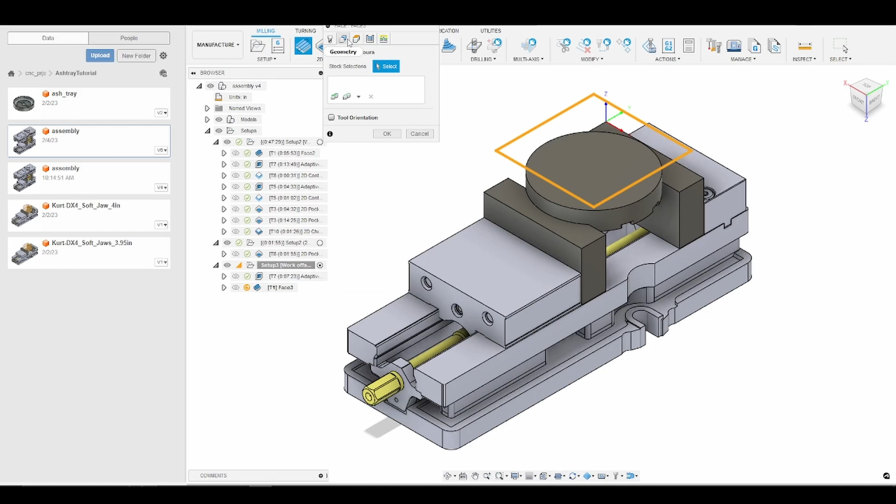I'm going into the geometry tab, leaving it the way it is, and going into the heights tab. Remember, we machined everything away except for 20 thousandths from the previous operation where we roughed the top. So I'm going to change the bottom height to be the model top, and change the top height to also be the model top, except I'll add that extra 20 thousandths worth of stock. Then we go to our passes.

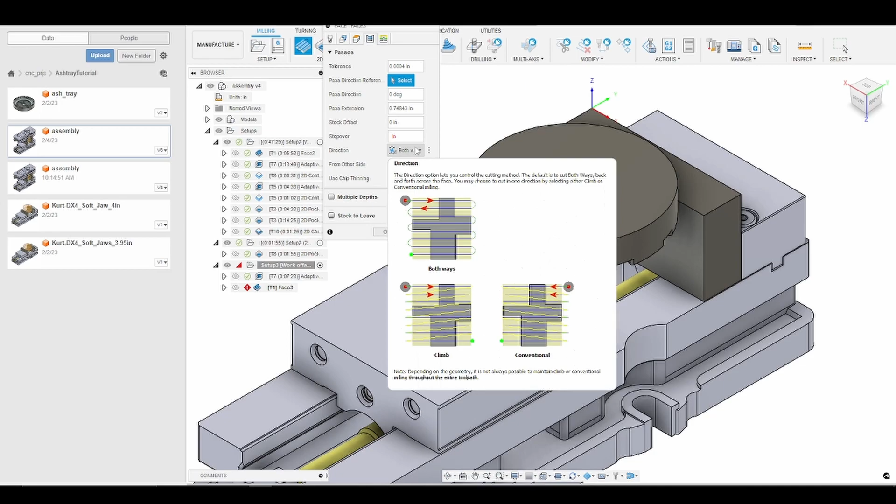Again, we're going to use 50% the diameter of the tool for our step over. That looks good. I'm going in multiple depths of 20 thousandths, and I'm going to check use even step downs and make sure in linking we check extend before retract. That way our shell mill will go all the way past the edge of our part and pick up before transitioning into the next pass, so we don't leave any marks while we dwell at the edge of the part.

Everything looks fine. Just looking over this one more time to make sure I didn't make any mistakes. It all looks good. I'm going to go ahead and press OK, and as always, we're going to simulate.

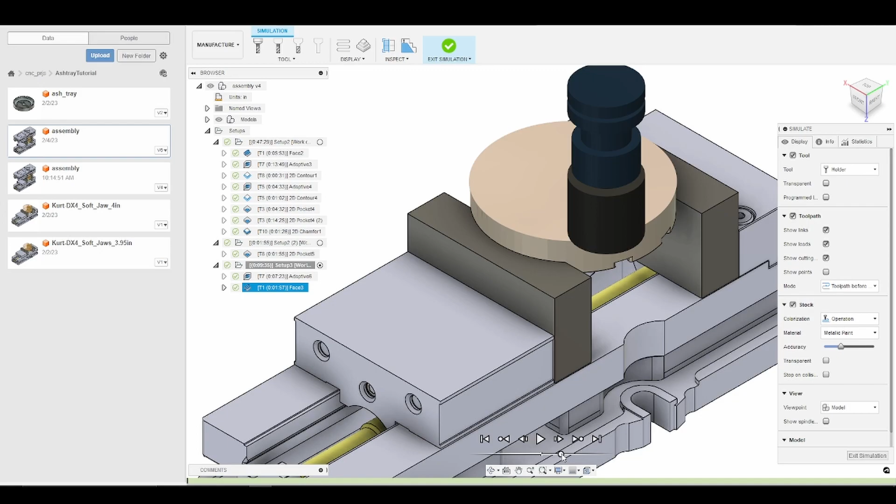Let's slow it down a little bit and we'll just go in and simulate. And there we go, we just face the back side of the ashtray.

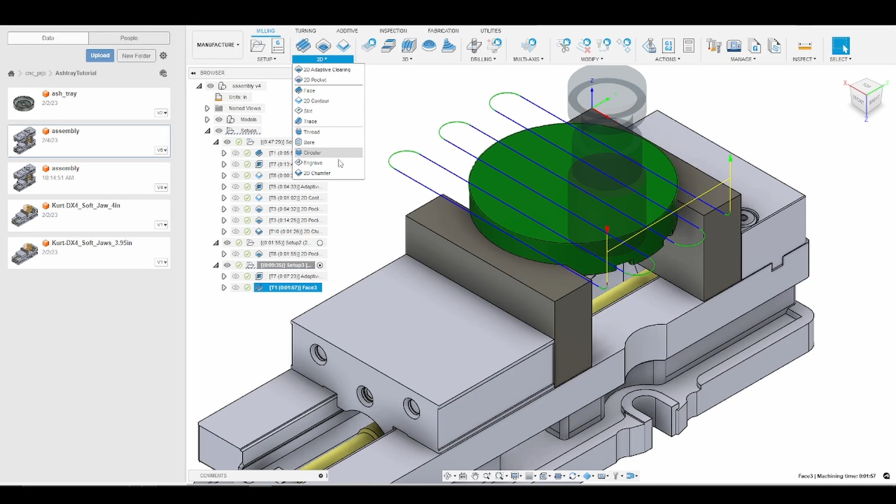Now to finish our ashtray, we're going to do a 2D chamfer just to knock off any sharp edges or burrs that may have formed on the outside perimeter. So I'm going to select the tool, go to my Toolpaths library, and select my quarter inch chamfer mill.

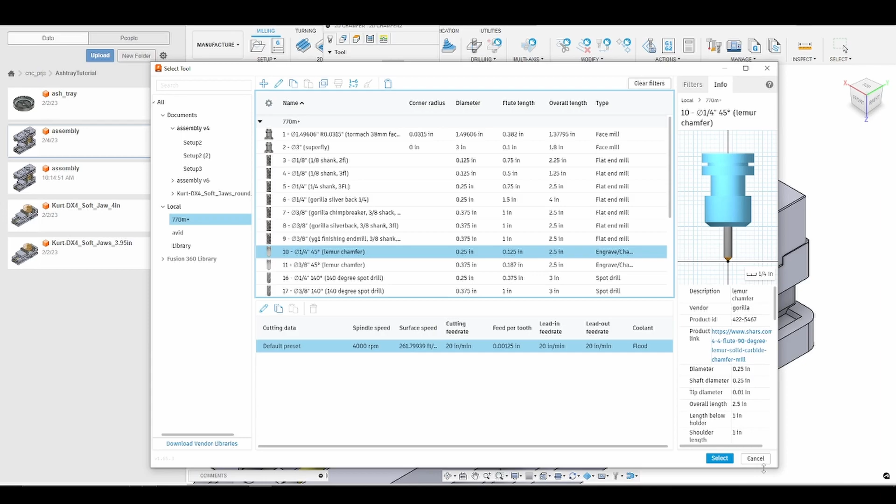We are running at 4,000 RPM, 20 inches per minute, which gives us about 1.25 thou per tooth. Going into geometry, I'm going to select the outside contour. There we go, and I'm going into heights.

Again, I'm going to make the top height the top of the model, and the bottom height selected contour is fine. We'll go into our passes tab, and I want a 15 thousandths chamfer.

You can make the chamfer width whatever you feel comfortable with. I generally use somewhere between 5 and 15 thousandths, I'm using 15 thousandths here. I'm going to enable smoothing and feed optimization, and go to the linking tab and change my lead-in sweep angle to 45 degrees.

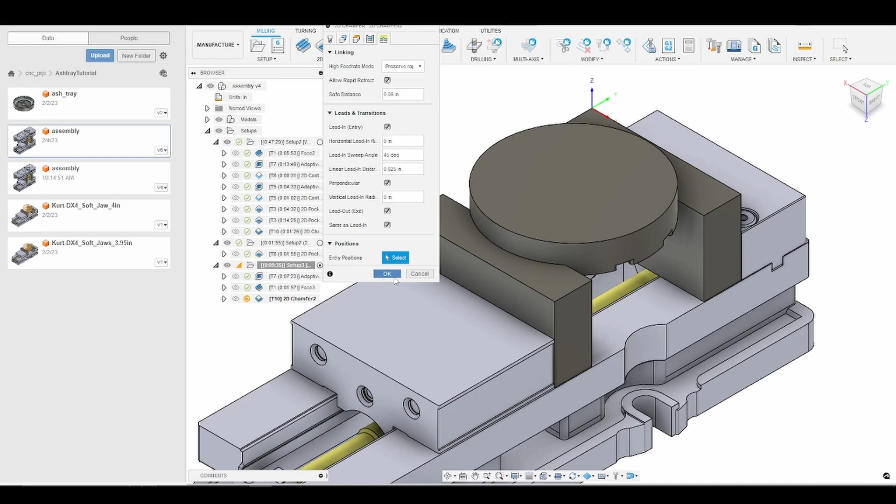Press OK, and Fusion will generate the toolpath for us. We'll go ahead and simulate. Should be rather quickly.

I must have pressed generate instead of simulate. So here we go, we'll slow it down a little bit. Should be a rather fast operation. Again, we come down and we just work our way around the part.

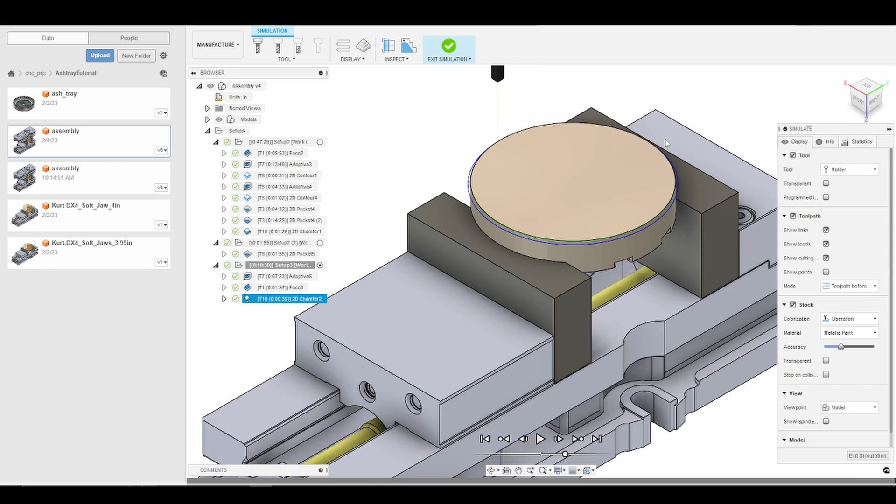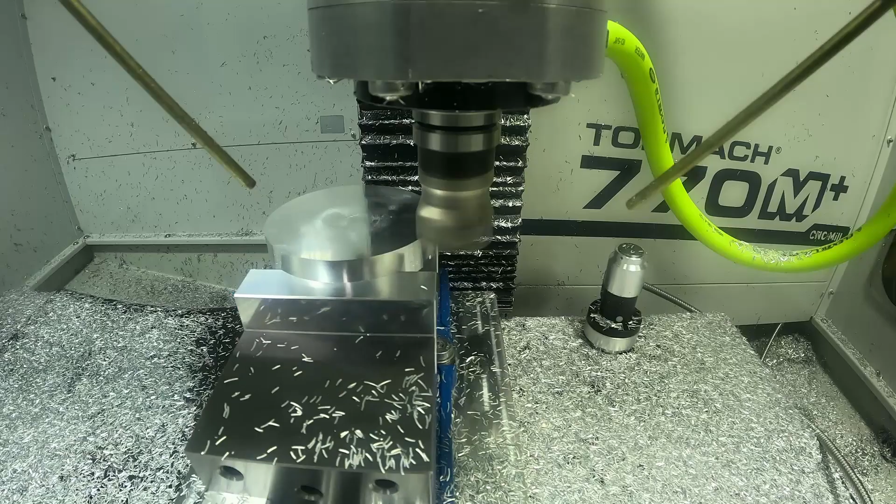Now we're performing the facing operation using the Tormach shell mill. We're going 40 inches per minute, 20 thou depth of cut, and 50% diameter of the tool for our width of cut. I'm just using air blast here. I wish I would have turned on the fog buster or flood coolant to try to get a better surface finish. My main goal here is to improve video quality and not get the lens of my GoPro wet so we can actually see the toolpath.

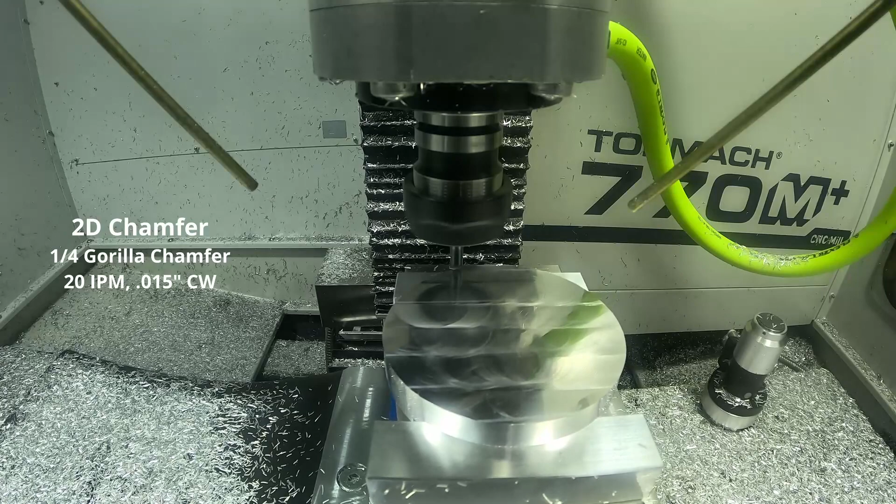Alright, so now we're actually finishing the part. We're just going around with the chamfer mill, putting a 15 thousandths chamfer on the edge, making sure everything's nice and smooth. We don't want to cut anybody or hurt ourselves on a burr when we pick up the ashtray.